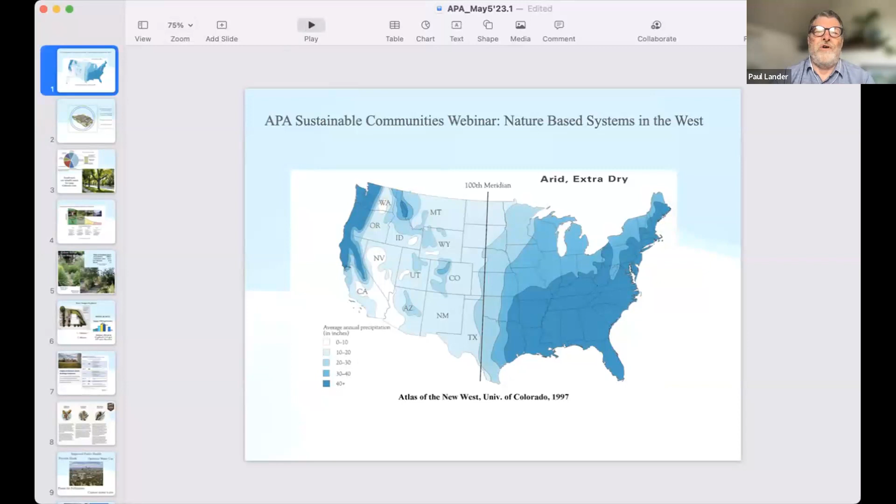So really, I just want to talk a little bit as an intro here about why we do this kind of work. Well, the built environment, as you all know, is a set of nested ecosystems, both physical and cultural. And the bioregion, again, is a frame that we have to think about, but also all of our community standards and codes. That's how we kind of define how we do that. Nature-based systems are increasingly being looked at as needed to be part of those codes and standards. So we begin to incorporate more environmental services. There's certainly elements and flows within all that we think about, and you'll hear a lot more from me and the other presenters, how critical your allied professionals are in this work. We all have expertise we bring to the table, but this is certainly a collaborative effort, including from the community.

Preaching to the choir here, but sometimes it's helpful for us to remember, especially if we're having to turn around and convince other people that trees and landscapes and nature-based systems in the most global sense are very valuable assets for most of our communities.

And increasingly, we have better and better information, and I'll share one later, where we can begin to delineate and actually give a fair amount of detail to the financial value that those services offer to our communities. And so it's an important thing to remember, as you know, making the pitch for nature-based services like anything else. Different recipients of the information respond to different things, but it's always nice to have a good financial basis to any discussion.

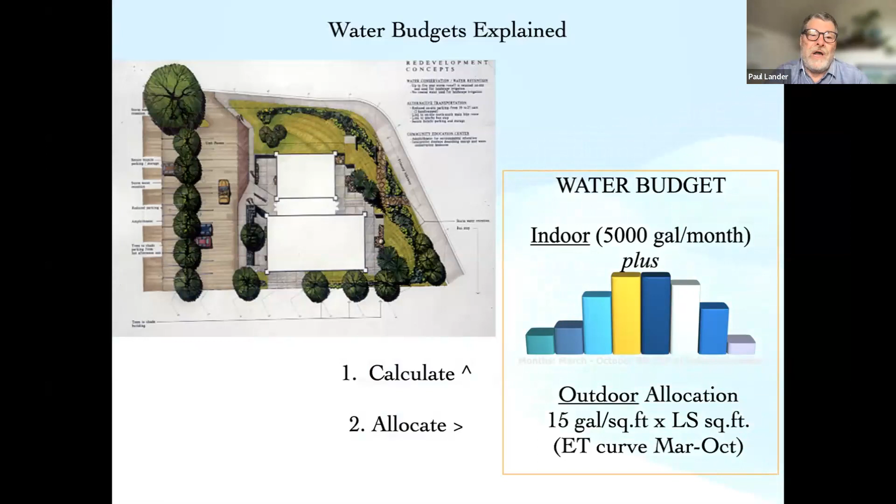So here's an aerial view, and you can see where we're able to delineate the light yellow green, both the landscape area as well as the rooftops in white squares, and then the parking lot. So we can very quickly begin to calculate the pervious area that is potentially landscape. And then on the right, we can allocate a certain amount of water to that. This case with the rising and falling colored bars follows the evapotranspiration changes over the months in the West. So we only allocate as much water as the plants need. What we're going to find as we move forward in this field is that we need more and continuous monitoring and measurement to make sure we are getting those environmental services that we require.

We're also doing a lot in kind of policy and framing why we do that, right? So many of you probably have heard the story of Denver's Green Buildings Ordinance that really started out as a green roof mandate from the citizens who voted, all buildings in Denver shall have a green roof. Well, the good news is fairly quickly we realized that was physically impossible, but everybody got together, went through an arduous process of 12 to 18 months and came out with, frankly, a better outcome,

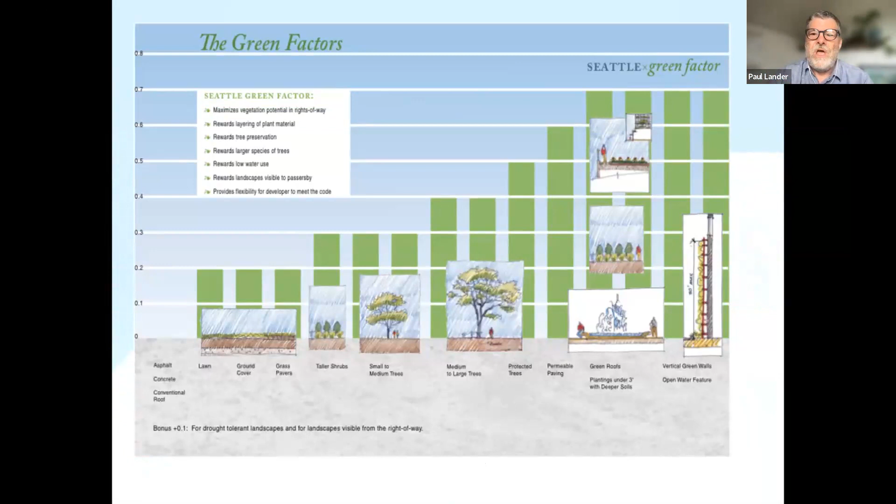The other thing to remember, just from Seattle, where a lot of you probably know, green nature-based systems aren't really just a horizontal feature. They can be vertical. Seattle's done that both in the case of trees, but also even large wall exposures. So more communities, depending on the bioregion, are looking at that as an opportunity.

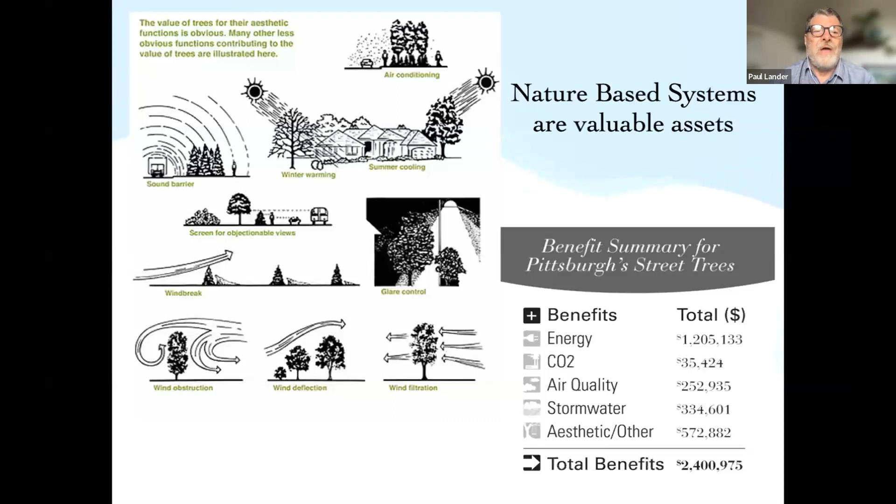And again, just reiterating what I said before, we get a tremendous amount of environmental services from nature, and recognizing that. And frankly, what we're trying to do now is be more transparent about that and more intentional and bring those in, because that is the backbone of our future infrastructure.

A great detailed report I'd encourage you to look at really explains this triple bottom line. How do we look at all the possible benefits of the things that Neil or Jen are going to be talking about? Because sometimes they're way beyond traditional environmental services, air quality, heat stress, actually not only avoided maintenance and replacement, but tremendous health benefits.

And so you start looking at some of these things, they're very, very strong cases for a lot of green infrastructure and nature-based systems. So we've got good information to make this case. And just reminding again, as well as lots of public health and tremendous amounts of mental health benefits that we traditionally haven't gotten from gray infrastructure.

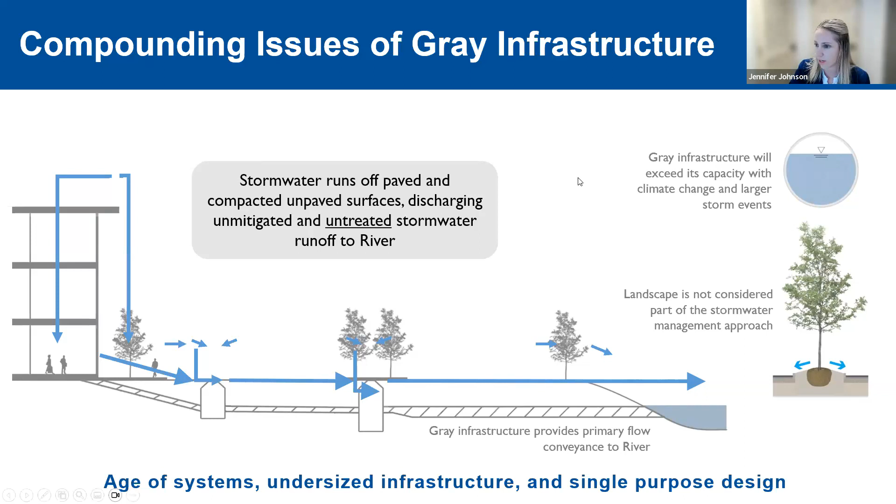So how do we get over that? Well, I think we already know the solution is really thinking about how we increase sustainability and resilience through nature-based systems, and thinking about all of the different relationships between buildings, the built environment, utilities, our water systems, the landscape, and partnering them together for maximum impact. And I think we all know that we can't completely abandon gray infrastructure. It does serve a purpose. But by partnering gray infrastructure with green and nature-based solutions, we're going to be able to build a lot more resilience into our built environment.

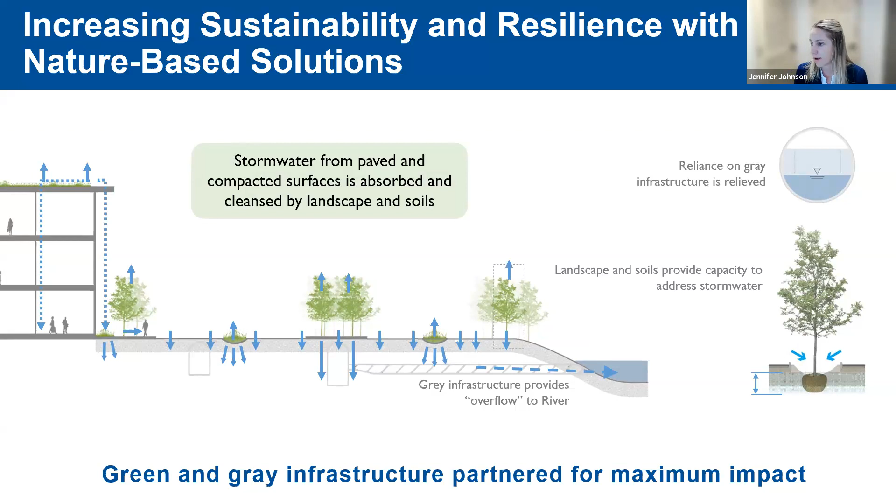As Paul mentioned, the triple bottom line of green infrastructure and nature-based solutions is so far-reaching. Climate change is not just a utility or built environment issue, it's really a human issue. These benefits get down to reducing heat impacts, combined sewer overflows and the benefits we see from that, the health of our ecosystems, restoring natural hydrologic conditions, recharging our aquifers especially out west, and sequestering carbon and improving economic development. There are so many benefits to these types of systems.

I'm going to get into the actual practicalities of green infrastructure and nature-based solutions, and then Neil is actually going to get even more specific for his Massachusetts community today.

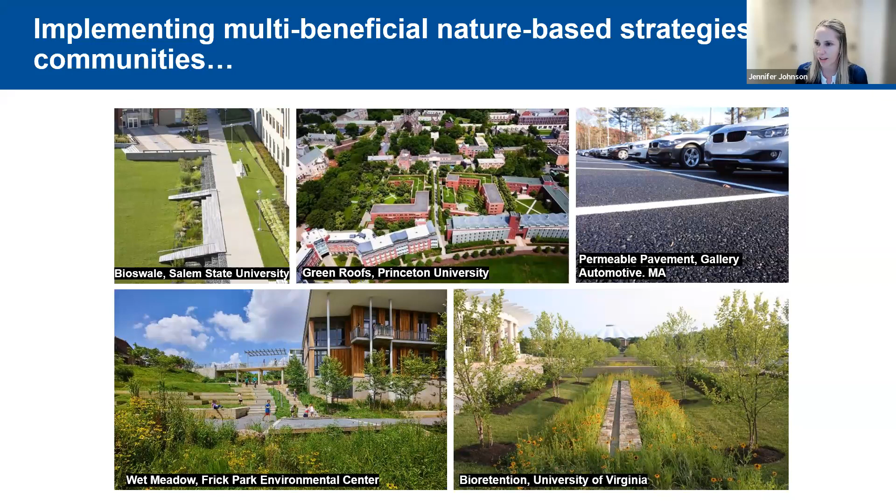So what does it look like? Implementing nature-based solutions looks like this. We add landscape back into our built environment, utilizing tools like bioswales, green roofs, like Paul mentioned, wet meadows, and really robust nature, soil, plant-based systems like bioretention basins. Permeable pavement isn't actually green, right? It's gray or black like asphalt, but it allows us to utilize and protect additional natural resources around parking lots because it's a stacked system that is absorbing and putting water back into the ground in locations where it can. So I'd like to include it as a green infrastructure solution.

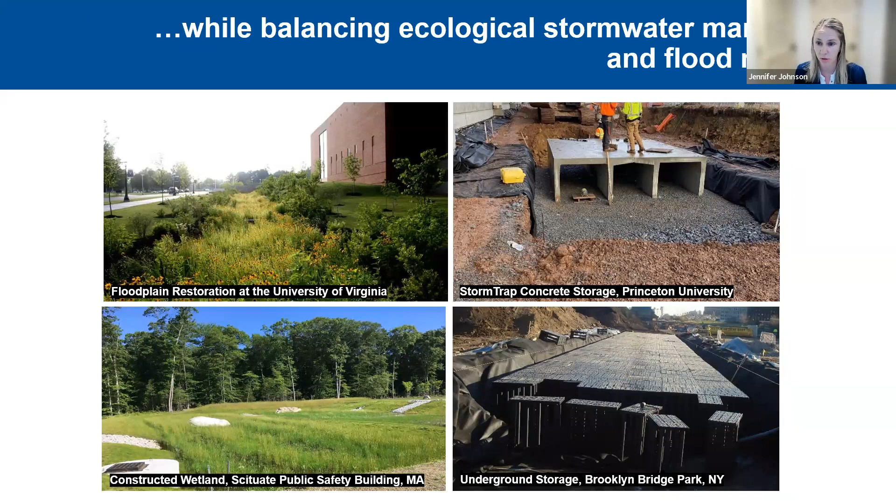So partnering those types of smaller strategies with larger ecological restoration and floodplain restoration, like you see examples of here, and even thinking about how we can build in more robust gray infrastructure when we need to for flood mitigation, which is an issue we're not going to get away from. So it's balancing smaller water quality based improvements with these larger challenging situations of increased runoff and coastal sea level rise type issues.

All right, so how do we get this done? I'm going to be talking a little bit more through some key tools, drivers and common strategies, and tying them into a few case studies from Eastern New England, as well as other parts of the Eastern United States.

From our perspective, there are so many different tools that need to be utilized to get our communities to be as resilient as we need them to be. So thinking about every aspect of site planning and design needs to be considered, from proactive planning that so many of you are working on, to thinking about more engineering solutions like increased capacity. How do we get that water to go where we want it to go? As Paul mentioned, water doesn't listen. We really need to proactively direct it, or else it's going to go in areas where we don't want it.

Public and private collaboration — now that we're getting more data, and modeling, we're recognizing the challenges we're facing. Understanding that it isn't just a public or government issue, it's not just a private landholder issue, we really need to come together to think about the optimized areas to hold water and provide that type of nature-based solution and treatment.

And then also thinking about data-driven design. This is something really exciting to me, as we're in an era where we're actually getting more data. It's not just designing to the best of our abilities, it's designing based on past lessons learned and past data that we've collected. It's really allowing us to improve and optimize our designs, feeding that feedback loop so that we can continue to make strides towards bigger and better impacts in the face of climate change.

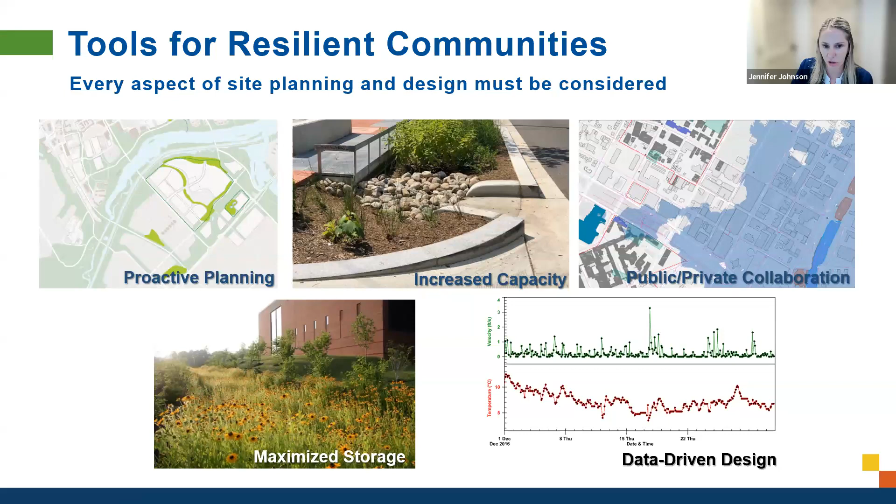All right, so I'm going to jump into a few more key themes and benefits of nature-based solutions from my engineering and planning hat perspective. The first being the restoration of hydrology and landscape ecology.

And this gets back to that idea of multiple systems. Thinking about the landscape as a system, our first line of defense to absorb stormwater, capture it, use the soils and the plants around our built environment to treat and hold water before it gets to the gray infrastructure system. Stormwater doesn't understand project boundaries, so really thinking about how these interstitial spaces between buildings and roadways can serve as a performative landscape. And then that ties into our next benefit and driver for these types of systems.

And that's increasing resilience to climate change. So we can think about hydrology on the site and even district or neighborhood scale, but these issues of climate change are much broader than that. So piecing together these projects to create much bigger projects with much bigger impacts, so that we can tackle the scale of issues that we're seeing.

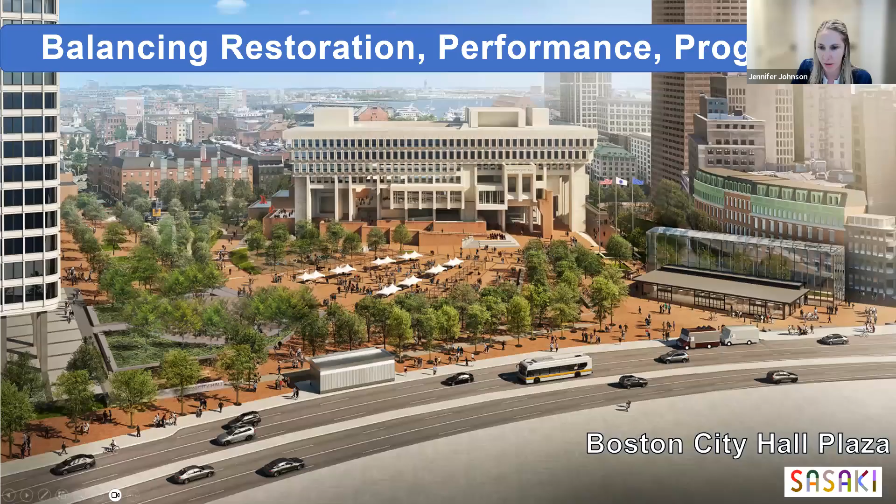I wanted to include this slide. This is an example of a project thinking about both hydrologic, landscape, and utility improvements.

This is City Hall Plaza in Boston. Boston City Hall is not known for being the most beautiful building with its brutalist architecture, and the plaza was not much different, actually. Unfortunately, it was kind of an eyesore, a lot of brick. It's over major utility corridors and the MBTA, our local transit system.

So recently, the project went forward to think about how they can balance restoration of the plaza, thinking more about landscape and heat, how to provide those benefits with the performance of the space in terms of stormwater management, and also maintaining the programming, because it is such an important area in the city.

There's rallies and our parades are held here when we win some of our sports titles. So this is a really important space, and I encourage you to come visit because it's undergone such a huge transformation over the last few years. It's finally built.

Also in Boston, I wanted to mention a few examples of how the city is going forward with building consensus, because that's such an important barrier to overcome with nature-based solutions, kind of the mindset that we're already doing so much. Why do we need to push this even harder?

So the Boston Water and Sewer Commission certainly has a lot of challenges with water quality, and they're trying to utilize as many tools as possible to disseminate this information about the practicality of how to implement more green infrastructure. So one of the ways they've done that is to develop this green infrastructure planning and design handbook.

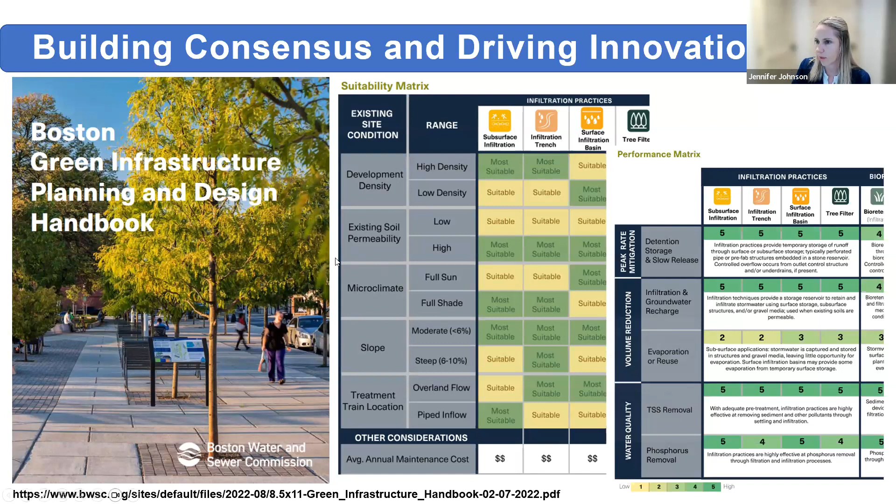So shifting across the river into the city of Cambridge, they're also doing a lot of work to build consensus and push innovation forward. This is a great example of how they've used planning documents, in this case their Climate Change Vulnerability Assessment, the CCVA, and built on the data developed initially for that resource into integrated modeling that puts together both the storm surge and sea level rise issues we know are coming with precipitation-driven rainfall.

It really has generated these maps that are being used by practitioners and developers across the city to understand what the flood risks are under 2030, 2050, 2070 climate scenarios, and allowing them to really get the full picture. Because one of the challenges we're seeing is 2030 is only 7 years from now.

It's sometimes before these projects will even be built. So it's not even in the future. And these projections are certainly within the typical lifespan of a given development. So we need to be thinking about these now as we're designing. And this puts numbers to that so that we have a target.

They've also utilized all of this information to inform their regulations. I provided an example here of the 2021 stormwater regulations they put forth. They also have a green roof bylaw, similar to what Paul was mentioning. So it's driving their policy, which is driving forward innovation and site design, because as an engineer working in that city, it's pushing us forward to really think more broadly about the types of solutions that we can fit in these dense urban environments.

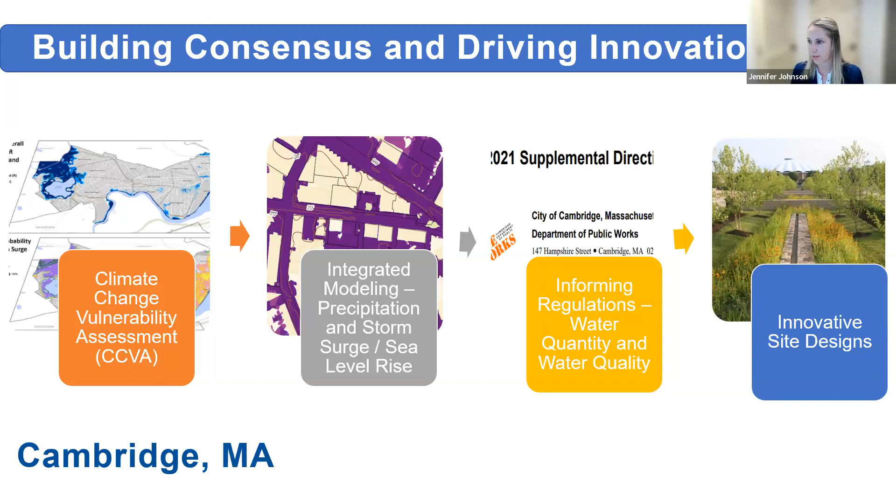One example I wanted to provide is this public Montessori middle school located in the city that we worked on. It was designed with its own stormwater management system, including a rain garden out front, as well as major rainwater harvesting and reuse for irrigation on the fields out back.

Based on the modeling performed in that part of the city, this area was identified as a site that needed to hold even more water to help protect the surrounding neighborhood. So there's a 1.5 million gallon stormwater storage tank being proposed in the bus loop, as well as a 150,000 gallon rain garden with subsurface storage that helps capture water collected at a low point in the driveway, at the intersection of some residential neighborhoods. I thought that was a great example of a city partnering with its own projects to think at multiple scales of solution.

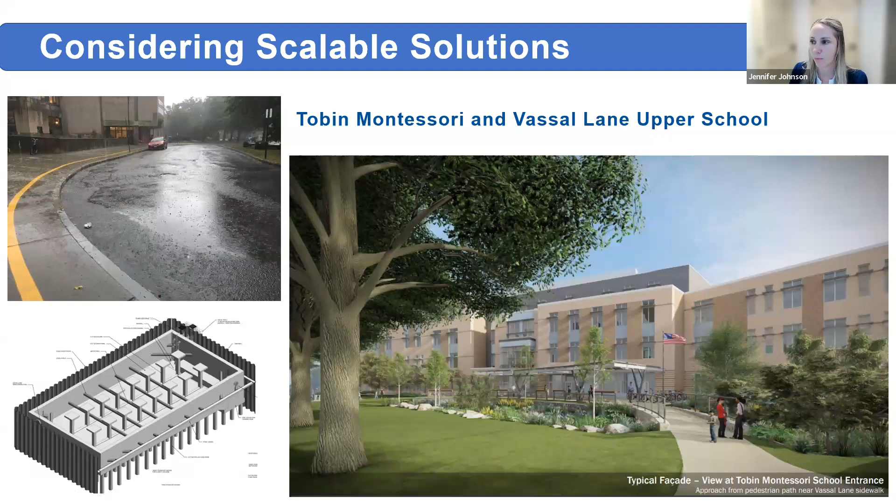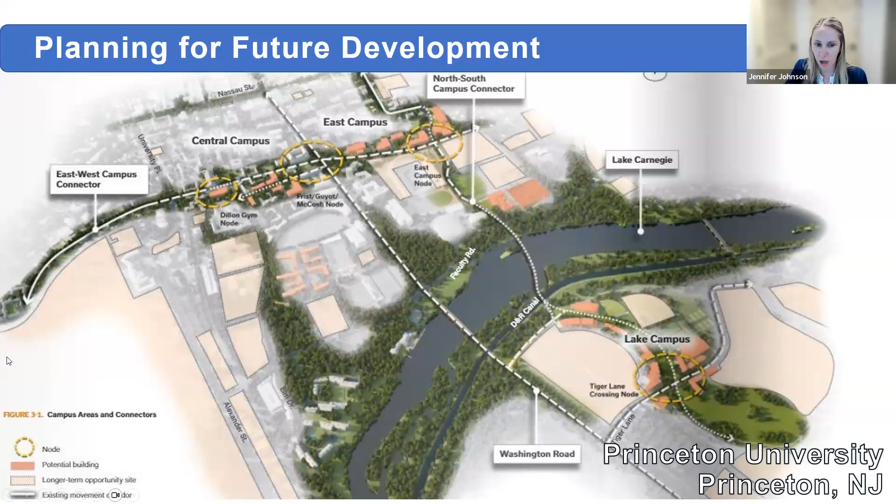Also thinking about planning for future development, when considering where those large tracts of land are going to be, we can propose some broader ecological solutions that help push forward nature-based solutions at the bigger scale, which is what we need to be doing, especially at the master plan level. If we don't do it then, there's no hope for the future. This helps us realize economy of scale and plan ahead, so when we put a shovel in the ground, we've already thought through the best use of this space from a water management perspective.

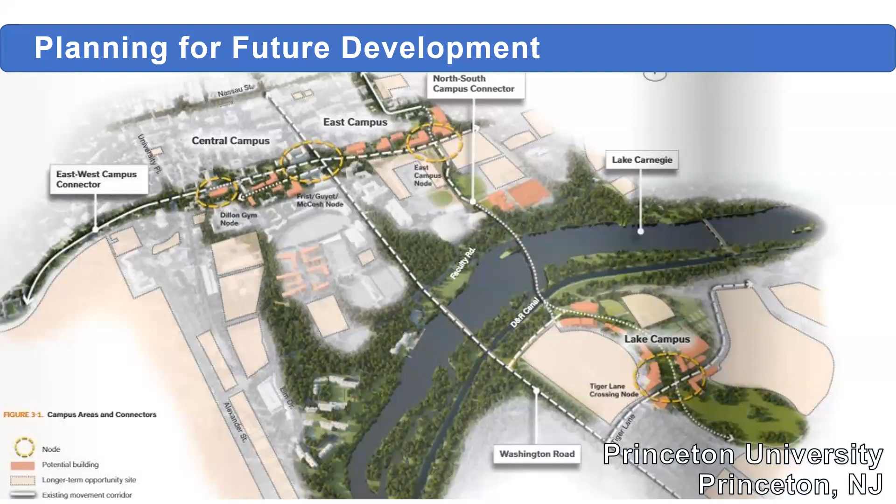And then finally, I'll leave you with additional thoughts about data-driven design, which I think is one of the most exciting things happening right now.

We're seeing more need and more gathering of data to help inform the MS4 permit program, a stormwater program that requires wet and dry sampling of stormwater management to really quantify your quality. There are more opportunities even for citizen science, which I think is really exciting to see, getting more engaged and realizing the benefits there, and using that to inform the public and build that collaboration.

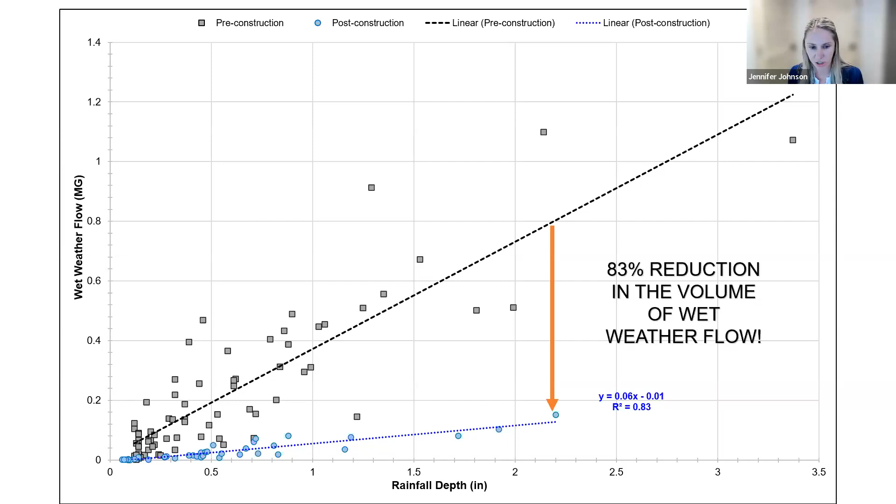I am. All right, Neil, I'll turn it over to you. Thanks, Jen. I will get my picture back up here, if I can. There we go. Hello, everybody. All right, let me get my slides up here and we'll get started.

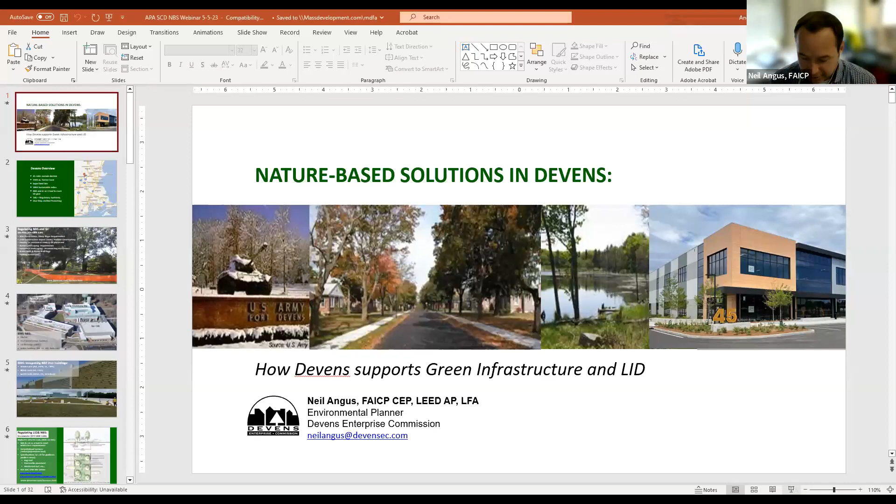I am Neil Angus. I'm an environmental planner with the Devens Enterprise Commission. We are the regulatory authority overseeing the redevelopment of an old military base about 35 miles outside of Boston, former Fort Devens. It is a Superfund site.

Left with a lot of brownfield sites that have been cleaned up to date. But when the base closed down in 1993, the surrounding towns and the state got together and wanted to see how they could redevelop in a more responsible manner. So sustainable redevelopment was a huge directive at that time. Going forward, we looked at nature-based solutions and green infrastructure as one of the many tools to help meet that sustainable development goal.

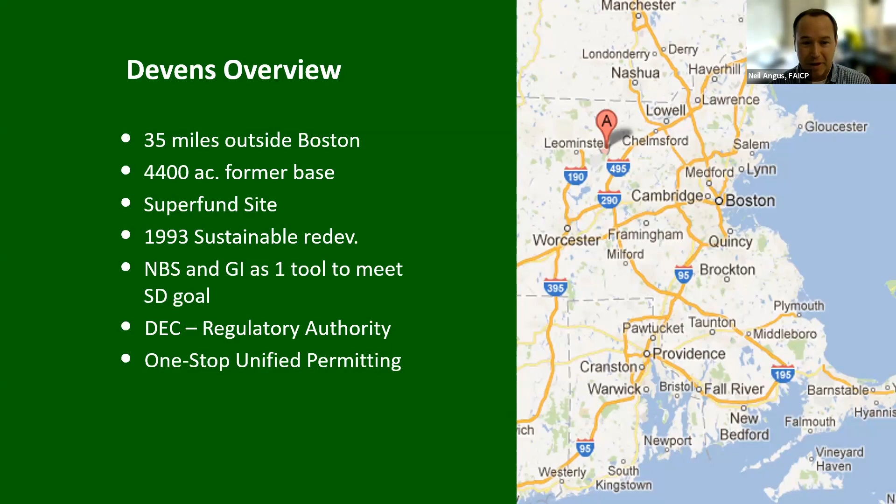So I work for the Devens Enterprise Commission, who is the regulatory authority. We operate with a unique one-stop permitting system. It's a unified permit. So the board I staff is the Planning Board, the Conservation Commission, the Historic District Commission, the Zoning Board of Appeals, and the Board of Health. It's a very unique program, but it really helps with streamlining permitting processes in Devens.

So we've created a lot of regulations to help facilitate more green infrastructure and nature-based solutions. Everything from our site plan regulations, including tree preservation, steep slopes requirements. We limit construction zones, we don't allow for clear cutting of properties. We have native landscaping requirements, functional landscaping requirements - not just plant a couple of trees, but look at the surrounding ecosystem and how we can reconnect to those existing more natural ecosystems. Green roof and wall requirements, parking maximums to help facilitate smaller footprints of development.

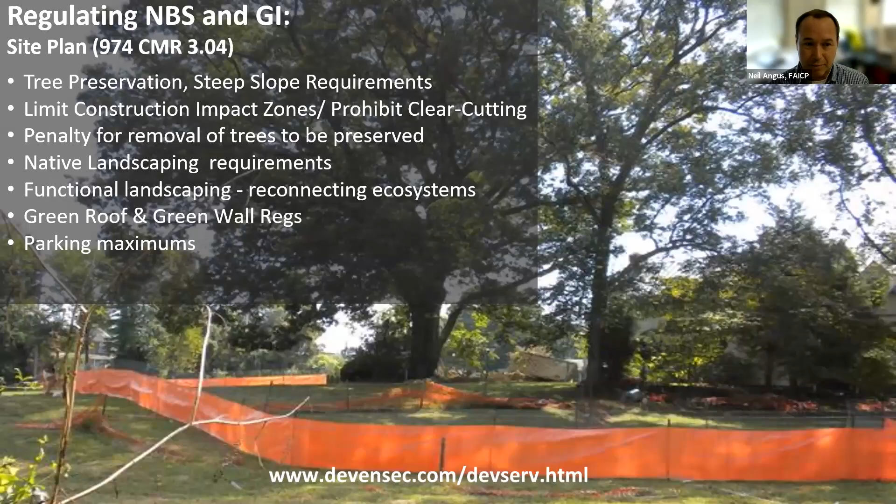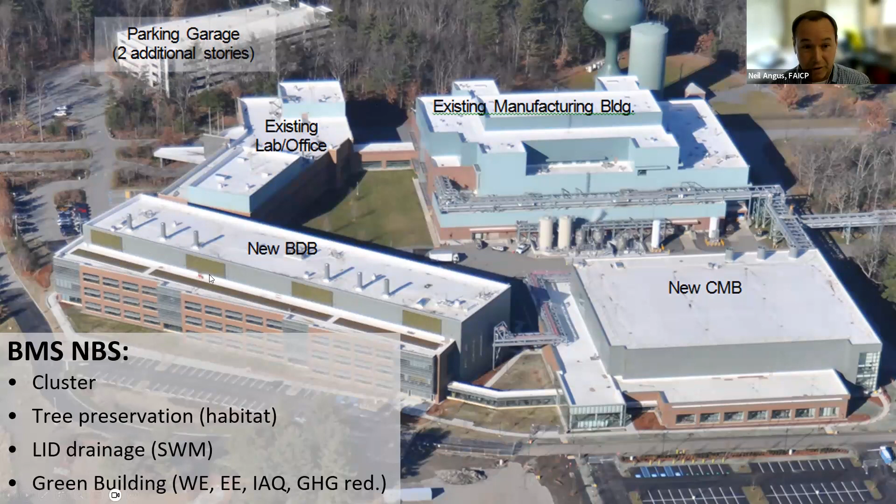Vertical parking going up instead of out to reduce the footprint of the development. A lot of low impact development techniques in the landscape islands. You see some green roofs and green walls on this front building, the BDB building there.

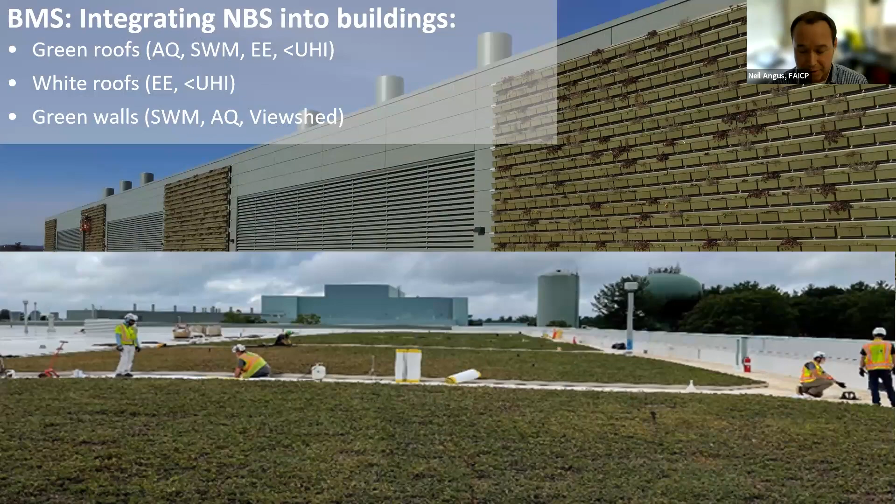Here's a close-up of those green roofs and green walls, just newly constructed. A lot of obvious co-benefits for these systems - green roofs helping to deal with air quality issues, mitigate stormwater impacts, promote insulation in the building for energy efficiency, and reducing that urban heat island effect. So some great opportunities for integrating green infrastructure there.

We also have regulations that require low impact development as the first line of defense for stormwater management. We're lucky we have really good soils in Devens, very porous sandy soils. But first and foremost, we do require people to infiltrate on site as close to where the rainfall hits the ground. So that helps us create these decentralized systems.

But we don't just tell people to do this, we give them guidance. We have vegetated roof requirements and guidance, permeable pavement specifications, reinforced turf specifications, and a lot of these resources that helped us do that were from the University of New Hampshire Stormwater Center. So I put a link in there for that as well. And Mass DEP has some good guidance as well too.

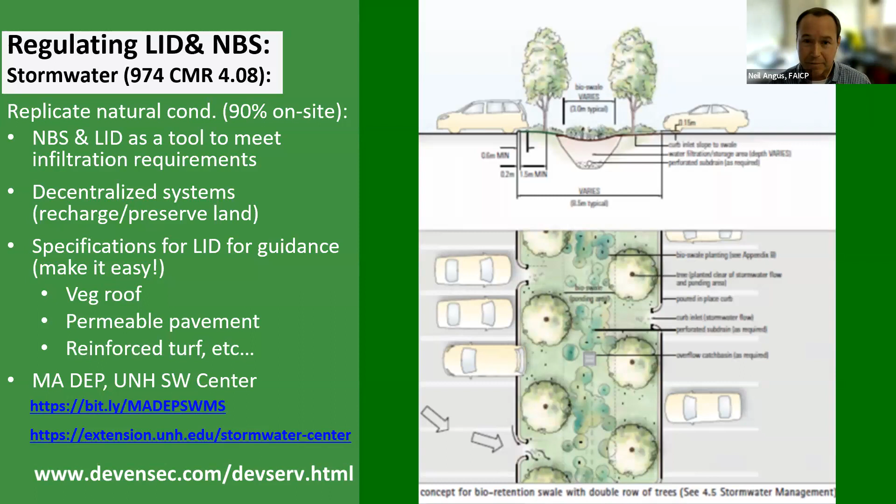So here's a great example of LID - a biofiltration landscape island in a parking lot. This is a 300 space parking lot. It has a total of 3 catch basins and they're just for overflow - I don't think they've ever seen any flow because they're so well constructed. But the key to construction of these systems is durability.

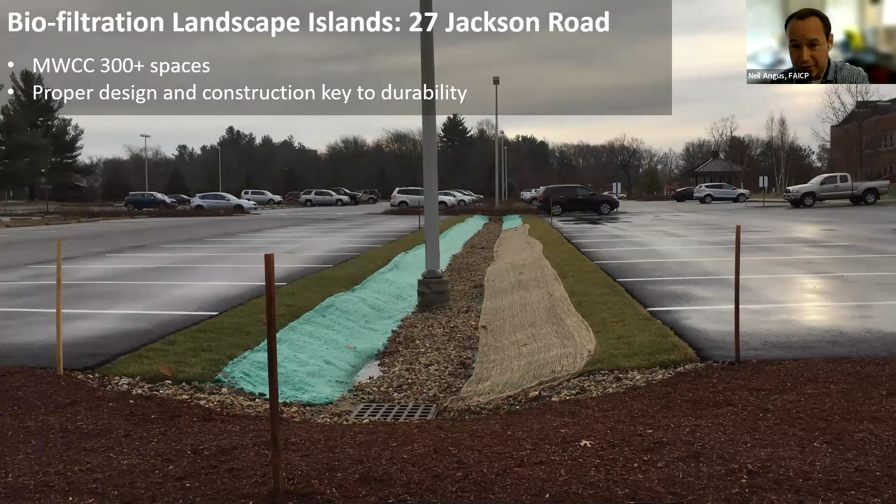So you can see here the beginning stages of the design, and then the final planting and establishment - that small gravel strip at the edge of the parking to reduce erosion and slow down the velocity. They actually ended up putting in turf in this area to slow down the water before it hits the vegetation in the main channel. And all the vegetation helps filter the pollutants out of runoff as well.

Other regulations we have in place include our subdivision regulations. We took a really close look at our regulations and realized that we had way too much pavement requirements in our local and collector streets. So we're trying to promote more green and less gray.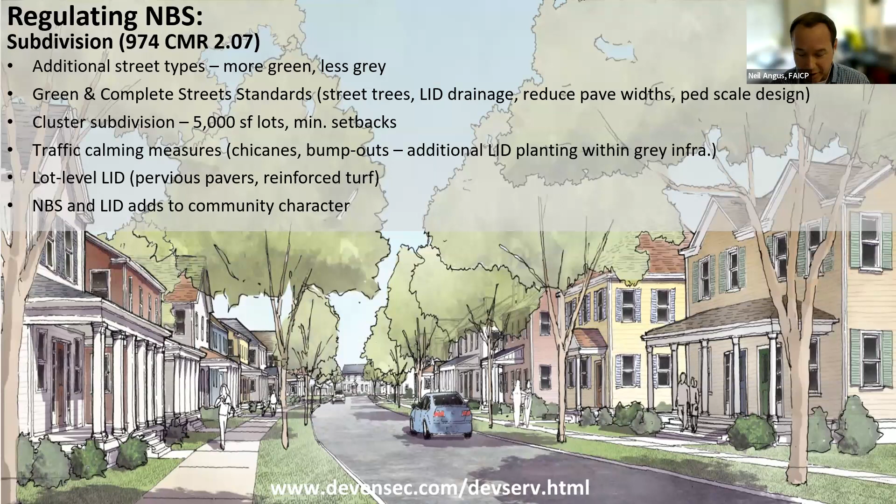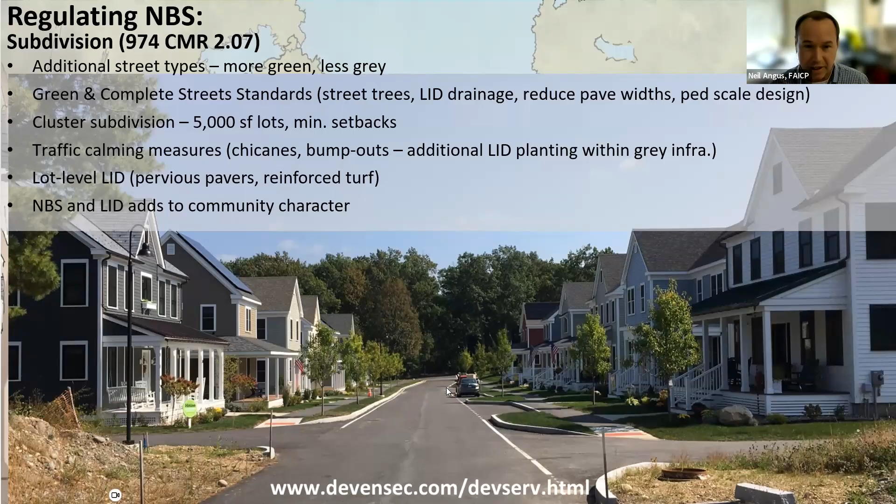Much narrower streets. You can see street trees, a lot of green in the area, and it actually turned out quite nice. This is what the area looks like today. You can see the bump outs. This is a 20-foot wide two-way street, so very narrow. Houses pushed right up to the street give a sense of enclosure, which naturally helps slow down vehicles, making it safer, but it provides all that area for green infrastructure. We've got landscape islands, brick pavers, pervious pavers, and rear-loaded driveways. So a lot of great features, and it adds to community character as well.

We also regulate rainwater harvesting. We require it for any type of irrigation system. It's really an inexpensive supply of water and helps preserve drinking water supplies. We spend so much money treating our water for drinking, and then see it spread on lawns for irrigation. It really bothers me, the amount of energy that goes into treating, pumping, and distributing water that's had so much money spent on treatment. So this is a great opportunity to reuse non-potable water for irrigation, toilet flushing inside buildings, and other uses that don't require potable water.

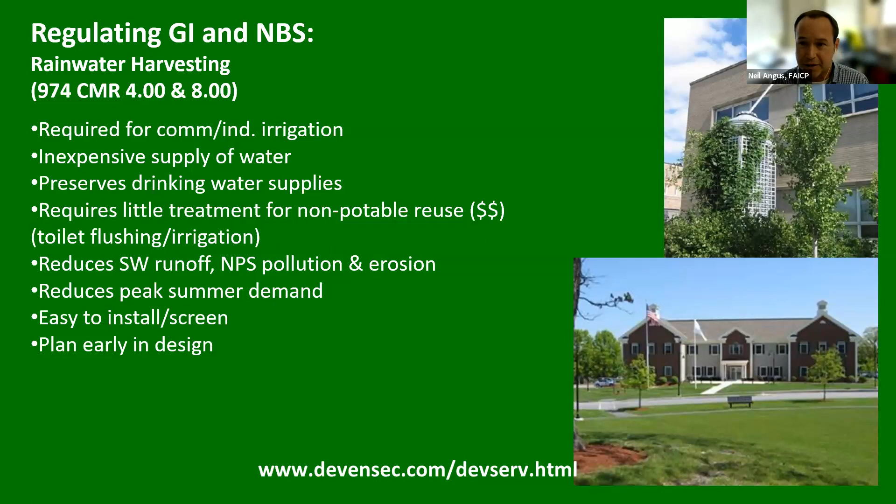It helps reduce peak summer demand as well. And as long as you think about these things early on in the design, it doesn't have to cost very much more. Here's a good example of rainwater harvesting, actually rainwater harvesting to the extreme, on Devens.

This is Little Leaf Farms, a hydroponic baby lettuce leaf growing operation. This is 10 acres of greenhouse growing baby leaf lettuce. The black areas you see here are rainwater harvesting basins, and they use that rainwater to irrigate up to 90% of their water needs for their crops. So it's a great way to reuse water.

For other nature-based solutions, they use low impact development techniques like biofiltration landscape islands in their parking area. The whole building is surrounded by earthen berms planted with pollinator meadows. That helps reduce stormwater runoff, but it's also a natural pest control. The pollinator insects like bees eat the small bugs like aphids, which feed on the lettuce. So it's kind of a naturalized moat around this greenhouse, and it's a great sustainability story.

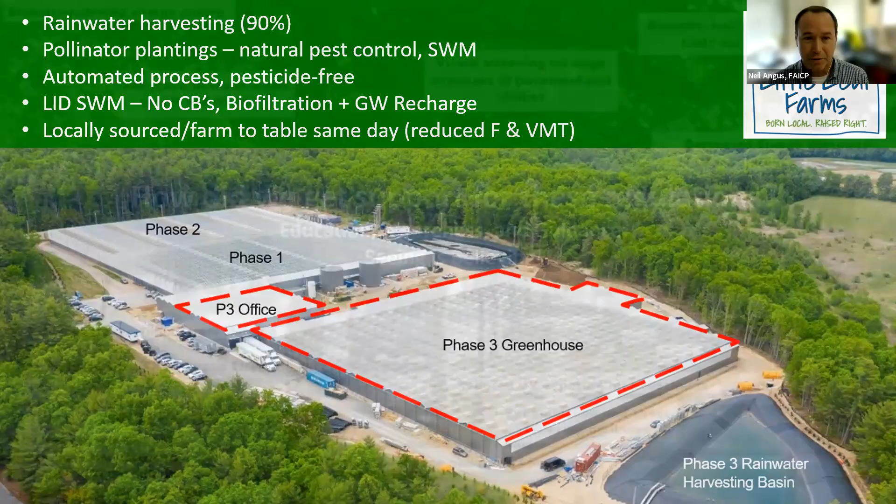So lots of regulations, but how did we get support for all these regulations? It's a combination of education, guidelines, incentives, and also seeing is believing. We've done case studies on Devens to show that low impact development techniques and nature-based solutions can actually work, even in the Northeast and cold climates. Biofiltration landscape islands can work and save you money at the same time. While there's increased cost for landscaping, site prep, and soil mix, you get a huge cost savings from the amount of pavement, curbing, and stormwater piping and structures you no longer need. There's a lot of benefits, and developers love to see those dollar-sign benefits when they're looking at these projects.

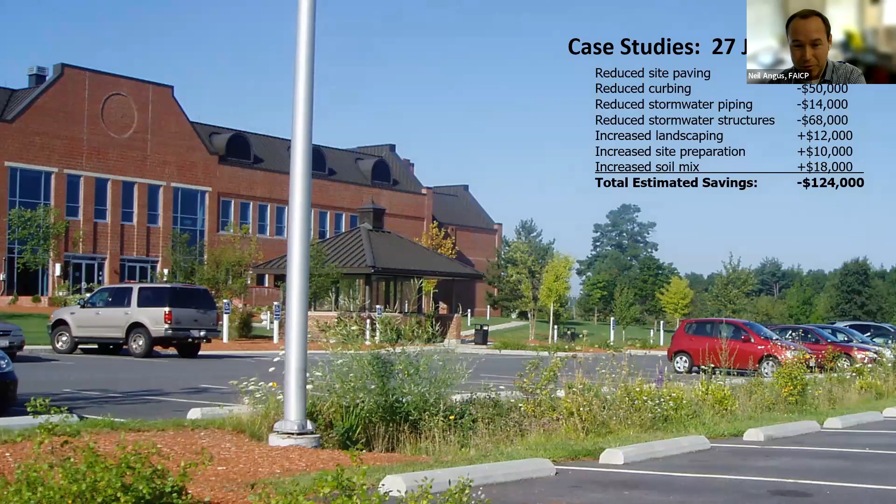We've connected developers and contractors with other developers who have done this stuff before. A lot of people don't have experience implementing these types of solutions, but connecting developers who have experience with them and showing how it can be done is a great example. This is an example of a LID technique installed on a new project. We partnered with the developer who did this project, and he basically trained the developer and contractors on how to do it, showing them how it's maintained and operated. So seeing is believing, like I said.

We also provide developers and applicants with guidelines too. So the green infrastructure guidelines that we've created for Devens, we've shown examples of how they can integrate all these nature-based solutions into one project, and also how those nature-based solutions can help meet multiple regulatory objectives. I mentioned co-benefits of nature-based solutions. There's co-benefits to achieving multiple regulatory aspects of projects.

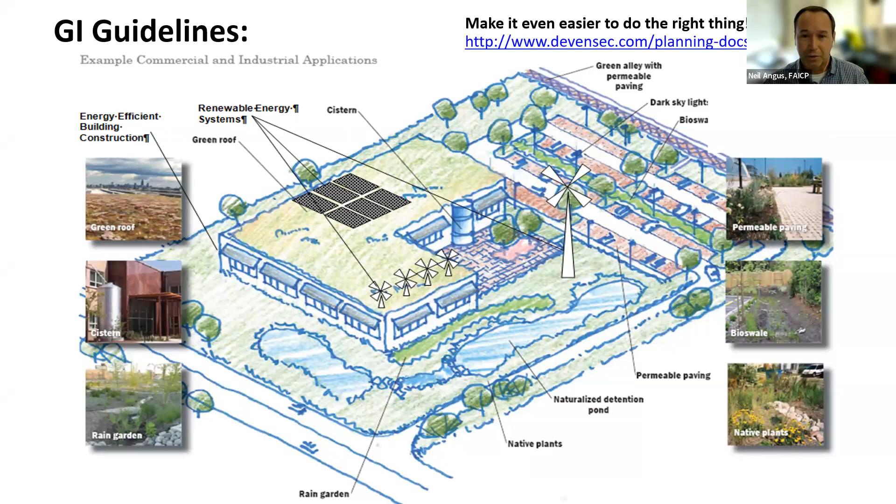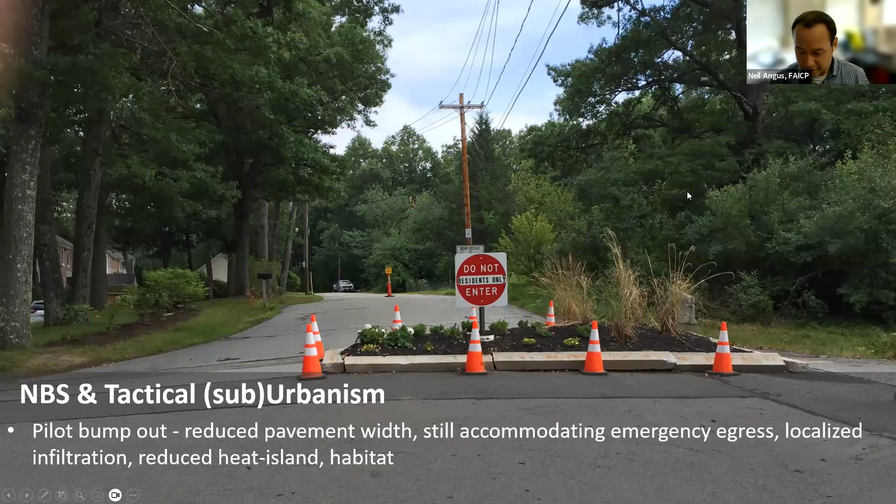This is our latest pilot project, really showing people how these nature-based solutions can work. This is a pocket forest project that we're working on with one of our partners in the adjacent towns. Tons of benefits. These pocket forests are basically a very intense planting area in underutilized urban spaces to help bring forested areas into the built environment. We prep the soils with really high nutrients in order to enable these high density type forests to be able to exist in urbanized neighborhoods, and all those benefits we can get from those forests are magnified.

The mental and physical health benefits of people having access to green infrastructure, healthy soils for stormwater management and greenhouse gas reduction, improving air quality, also taking underutilized spaces. This was just a lawn area before. Now it's going to be a productive piece of infrastructure that can serve as a habitat connection. As plants, animals, insects all want to jump from habitat to habitat, this allows them to do it a little better. So a really cool additional green infrastructure tool that we've been working on.

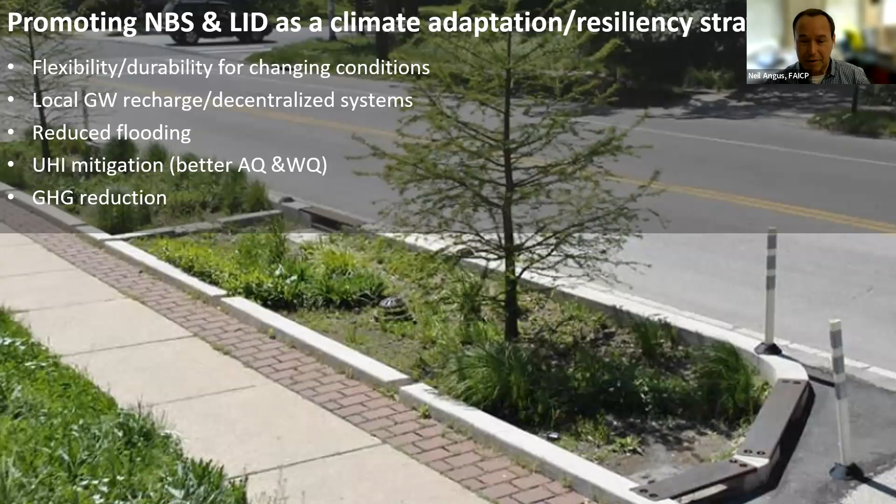We're also promoting nature-based solutions as a climate adaptation and resiliency strategy. You heard Jen mention closed drainage systems not being able to handle these more frequent and intense storm events. LID, it's an open drainage system. They have much more flexibility to ebb and flow with the peaks of those higher storm events. And also helping with greenhouse gas reductions as well, by providing plants instead of pavement.

Another education awareness tool that we've used to promote this is our Apple Country Natural Climate Solutions project. This looked at how healthy soils are an important part of the carbon sequestration strategies for towns and cities. We know trees and forests are great carbon sinks, but the soils can handle a lot of carbon as well. Wetlands can sequester even more carbon, up to 30 to 50 times more carbon than traditional soils or forests. Wetlands only cover 3% of the Earth's area, but they're storing 20 to 30% of the carbon. So it's important to keep them healthy and allow them to function and sequester even more carbon.

With healthy soils, the compounded benefits are just too much to mention. The ecological benefits, public health benefits, and it's really giving us more tools to help integrate nature with development. It gives us more arguments for preserving our existing forests, wetlands, and soils. So it's a great strategy if you're looking for more reasons why we should be protecting them and the importance of healthy soils.

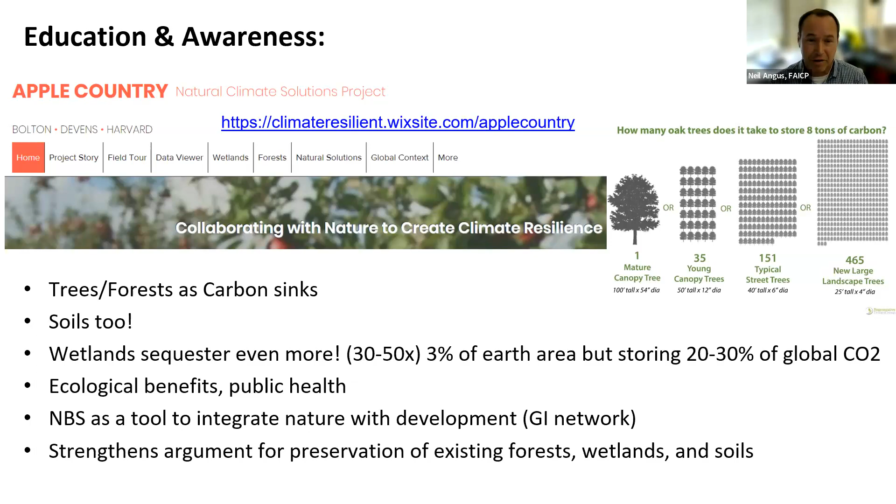Other education and awareness tools that we use to promote the adoption of nature-based solutions: I worked on a street trees and community well-being webinar with Green Roofs for Healthy Cities. They're an international green roof organization. This was a course on the triple bottom line benefits, tools and resources for integrating nature into the built environment. And that's what these nature-based solutions are all about, integrating the natural environment into the built environment not only for stormwater, not only for climate benefits, but for public health and wellness benefits.

Another cool program that we worked on with APA and the City of Lawrence was this street tree health impact assessment, really showing how vegetation, street trees and communities can help combat a multitude of public health, stormwater and air quality issues. It's got a lot of detail in it that even allows you to look at, okay, if there's a section of your community that has stormwater issues, here's trees that are able to absorb more stormwater that you might want to select.

And if a community is having issues with air quality, you might want to choose a different type of street tree that can help sequester more carbon, particulate matter, ozone. Trees are very resilient, and the right tree in the right place can help rectify or manage some of these public health issues that we're dealing with, as well as climate change and stormwater management.

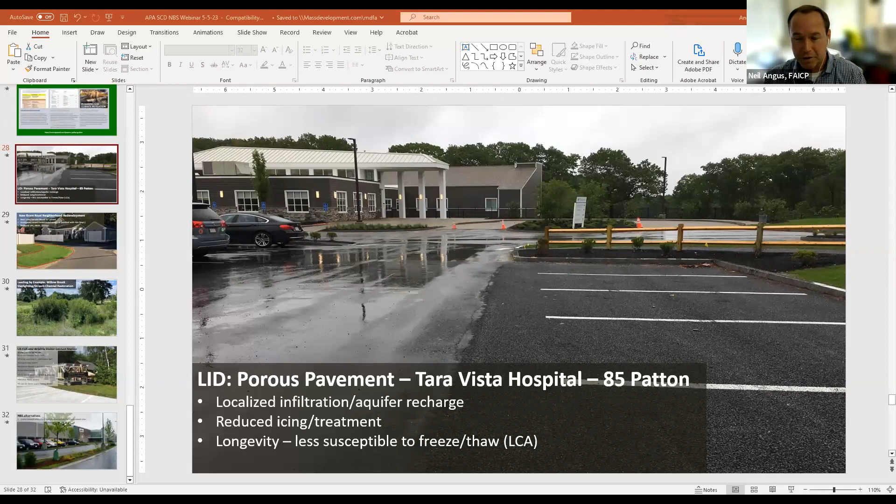The other thing I wanted to show was the other thing that Jen talked about, which was reinforced turf. This is in that new urbanist type neighborhood that I showed you. 12-foot wide alleys, paved ways. The other 8 feet or 10 feet is actually all reinforced turf. This allows the fire trucks to go in. So it's an alternative solution to porous pavement as well, for low traffic areas.

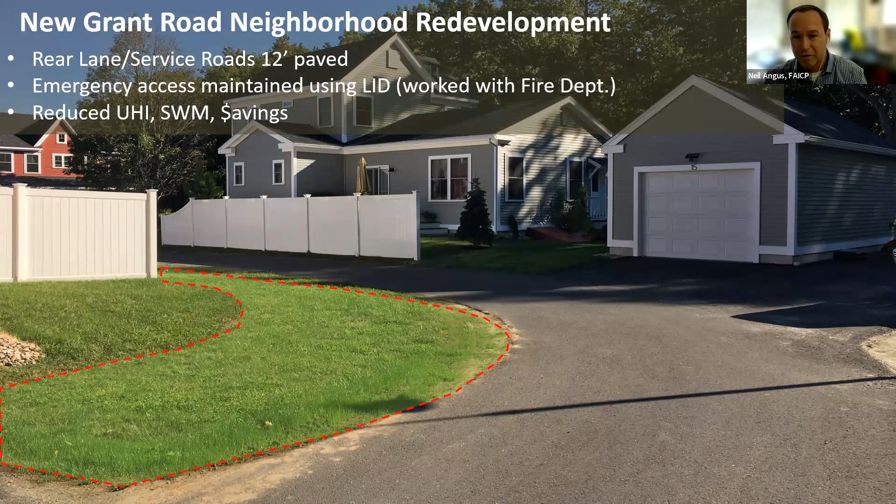It's a great opportunity. So I just wanted to confirm what they say, because I think one of the concerns for planners is we specify, and as you've all identified, it's a very specific design decision which one of those tools you need. So don't hang your hat on any one tool, because they're appropriate for different things. And that's the beauty.

There are a lot of tools, but sometimes you heard that earlier, oh, porous pavement is the answer. Well, again, it depends on the situation. And again, I would say it's a fairly expensive one, but I think you two have articulated there's a lot of other ways to capture water. So you really want to save that for your high visibility, high impact, like you said, high value kinds of things.

Next question. Let's talk about money. Let's talk about the cost of doing this. You know, everyone's on board. We all understand the benefits of it. We know that the upfront cost might be more, but years down the line, it's going to be worth it for so many reasons. Okay, so this is a twofold question. The first portion is, how do communities incentivize developers to incorporate these nature-based techniques?